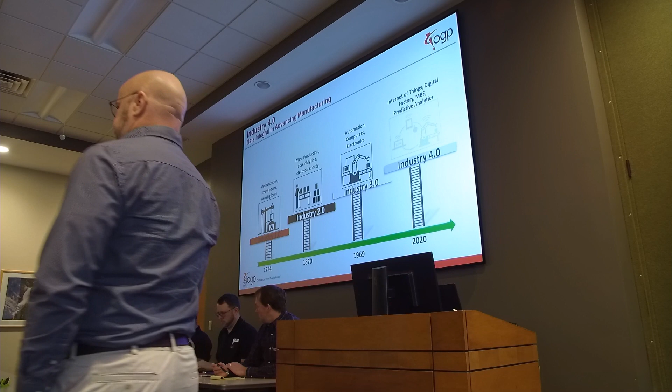So I'm going to go through each one of those terms and just give you a little understanding of what that is. So Industry 4.0, again, a buzzword. A lot of people don't really know why it's called Industry 4.0, what that means. But basically, it's the next phase in how we do manufacturing and how we automate things. So you look at Industry 1, Industry 2, and Industry 3. Those were real things as well. The most recent one was automation.

What's an example of automation? What's that? Cars. Cars, yep. Cars was automation. Something you guys probably interact with every day, a CMM or a smart scope. That's an automated tool. So that's really Industry 3.0, okay? Industry 2.0, you think about the most well-known is the Ford production line, right? Mass production, assembly line kind of stuff. And so each phase as we go through eras, really, you're making our lives as humans more efficient.

So Industry 4.0 is taking Industry 3.0 and connecting the dots. So I have this automation thing and I have this automation thing, and they should probably be able to communicate to each other so that that information can flow from a CAD system, which we're going to talk about today, to a metrology system, to a data analysis system, and all that information is connected to each other, and you gain efficiencies. So that's really what Industry 4.0 is about.

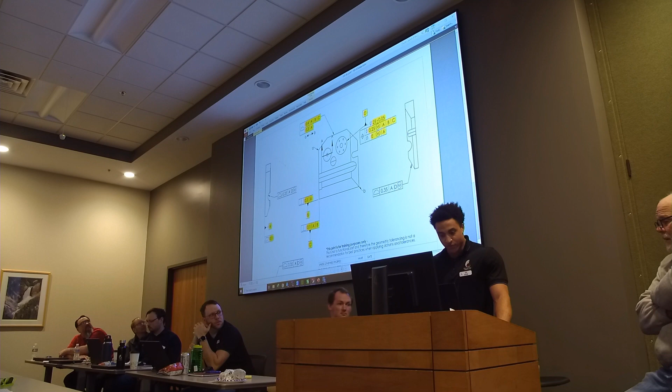So this is the print of that OGP demo part that Keith mentioned that I will be preparing the data for.

Are we okay, Greg? Greg Hetland approved, so we...

So if we don't have the QIF file right off the bat, we would just import the CAD model. So we have a step file for the part here. And the print says that this bottom surface is our datum A, so we'll go to dimensions and datums. Whoops, click the wrong surface.

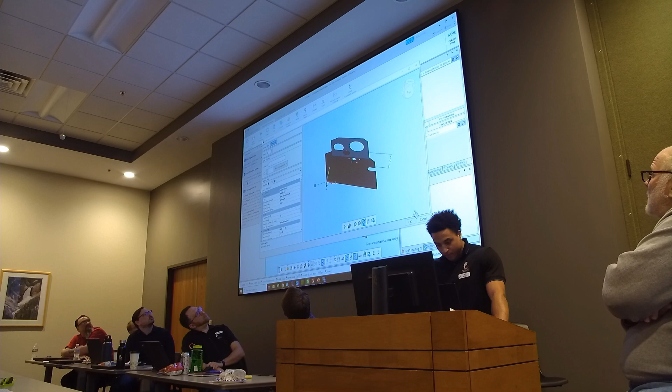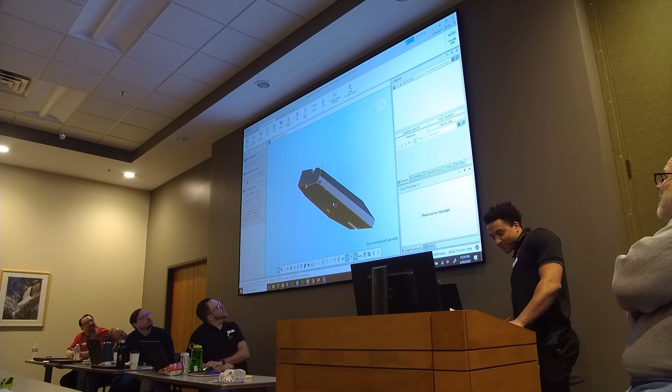Just a little bit. Yeah, there you go. There we go. So we'll call that datum A. We'll click on datum, and this drop-down menu allows you to name it. Yeah, a little louder. Oh. You're moving your mouse, that's why. Oh. Moving the mouse while we...

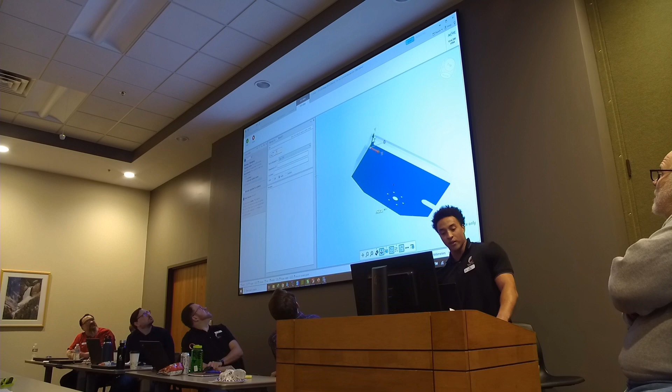There we go. Okay, so we'll call this datum A. I also see that we have a flatness call out for this surface, so we'll go to GD&T tolerances, and we'll select flatness, and on the print it says 0.1, and we'll label this as dimension 1.

Now we have everything set for our datum A, and this front surface is labeled as our datum B. We don't have to label the GD&T and datum separately. We can do them together. We just go straight to the GD&T tolerances. And for this face, we have a perpendicularity call out. And it'll bring you up to the datum drop-down menu, and we'll call this datum B.

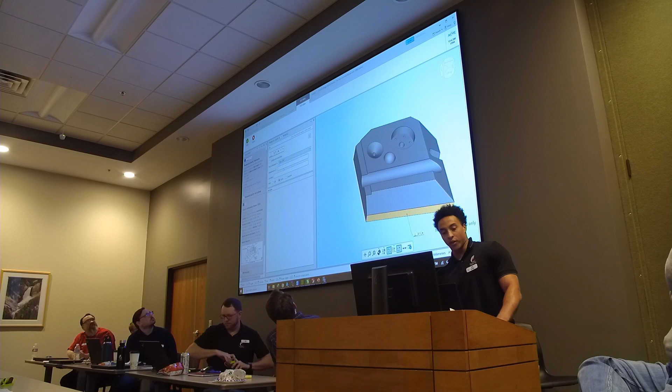Also, it automatically assumes that this surface is a plane, but you can change that type here if necessary. We'll click OK, and that perpendicularity call out is 0.1, reference to datum A. We'll call this dimension 2. And then our datum C is this left surface here, and another perpendicularity call out. Oops.

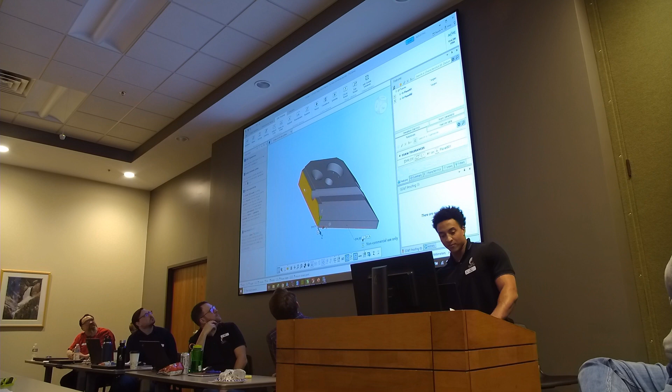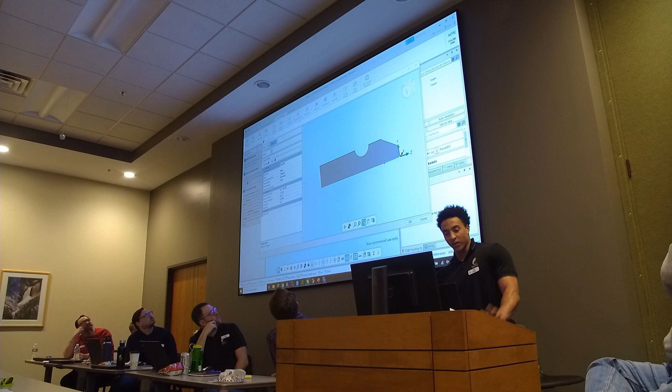Dragging the mouse. Roll the model over, make sure the bottom's not... All right. So we're good there. And this is our datum C. Click OK. Again, 0.1. This time it's referenced to datums A and B. This is our third dimension.

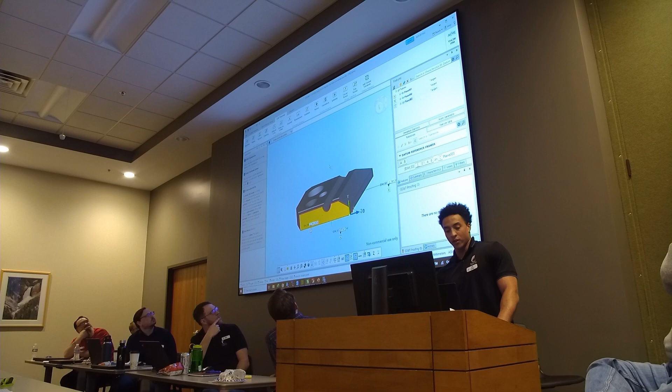And then our datum D is this cylinder here. And I notice it has a position callout. And we'll call this datum D. And this feature of size here, this 25mm diameter, is its own characteristic. So this will be our dimension 4. And we have a plus or minus 0.05mm tolerance.

And this position is 0.25. And we have a max material condition modifier. And then this icon gives a drop-down menu of all the suggested datum reference frames that we can use. And on the print, we have ABC here, so I'll click on that.

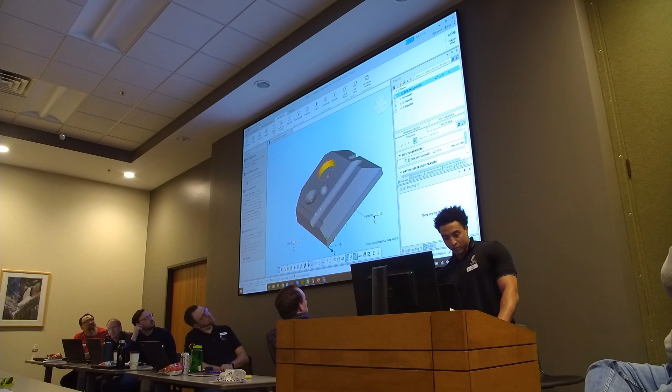And then we also have another tier here. So we'll click on this plus sign to get this bottom part. And on the print, it's 0, and it has a maximum material condition modifier to datum A. And we'll call this our dim 5. And that's pretty much how we would build the...

So you're 20% of the way there. So we're 2 minutes in, and we're 20% of the way into defining our GD&T project here. So you can see it goes pretty quick, and a nice thing is that it becomes the source for Zone 3, the source for PC-DMIS, the source for CT scanning. And so that's our way to put that together. And the other nice thing once we have it done is that we can generate this set of test points to see that our reporting is right.

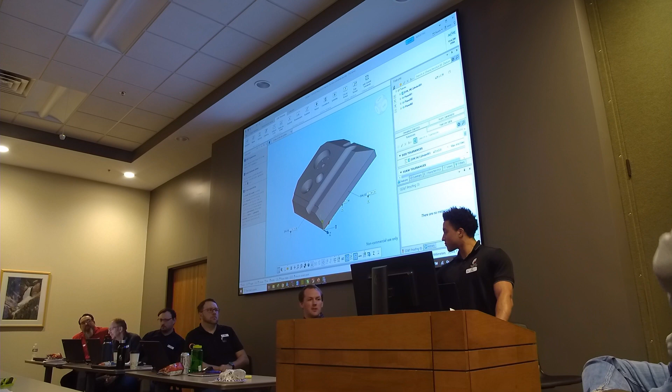Adam, are you just going to give a quick? Yeah, we'll step to that in just a second. It's fast to set up, but if we have 100 dimensions, 150 dimensions on a part, it starts to add up some time, where the QIF can really be a time saver in passing information between different processes. Setting up 5, 10, 20 dimensions, not a big deal, pretty straightforward. Larger, complex parts really see the benefit. Does this all make sense so far? Cool.

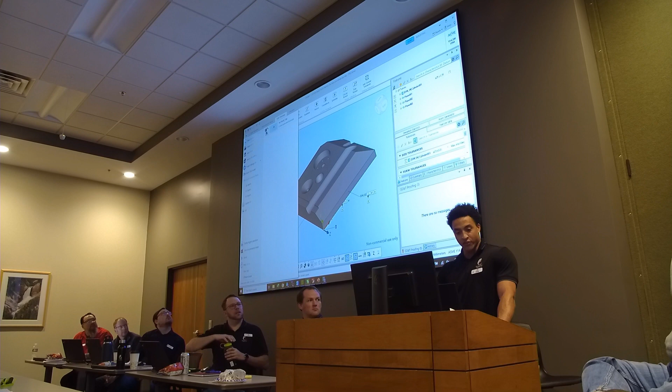All right, and then let's say we do have a QIF file. We can just import that, and we already have all the GD&T callouts on there and all the dimensions. And oftentimes the dimensions won't come labeled. We'll have to spend some time going in and numbering all of them, but it still saves us a whole lot if we have all the GD&T already in there.

And on the left side of the screen here, we have this explanation column, and if we click on one of the GD&T callouts, it gives a brief description of what's going on in each, and then it also gives us a link to the page in the GD&T standard that talks about that particular feature. That's that right there.

And then this GD&T proofing column shows any warnings or errors that may be present in any of the GD&T callouts. For example, here we have this message: apply size tolerance to the feature or remove material condition modifier. And that's talking about our datum D here. So if we go to our feature tree here, we'll go to our datum D.

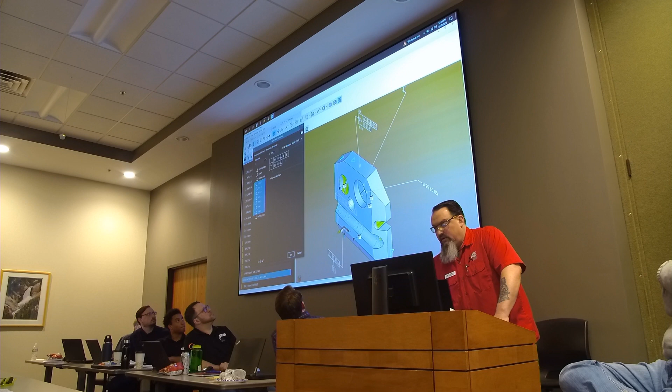So this particular call out is for profile from A to B. And that is these planes, this little notch in here with the planes, this radius, this plane in here. The problem that it's having is, it has a bunch of planes and a radius. We can't put all those. PC-DMIS in GeoTol won't take all of those into one thing. So to fix that, we go in and we make a feature set. And we start grabbing these points.

Create. Go back here. I'm gonna get rid of all those. All I want is scan 2. And all of this looks good. I like clearance cube on square parts, so we're gonna turn that on.

Manual mode, I can turn that to DCC. That's a bad plan. Don't do that without a manual alignment. The machine has no idea where the part is. Some other things you have to add. You know, at this step, we go below the load probe command, put in a manual alignment, and move on from there. But we can execute it.

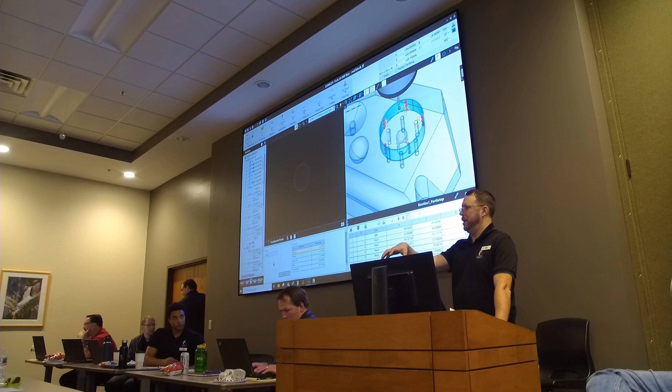And in this case, it's going to try to run a traditional probe, then switch over to the star probe for the bottom. So the order needs to be adjusted. One of the things I can do in Zone 3 is optimize my entire program, and I can go with sensor ordering. So now when I click OK, it's going to change the order of my features and combine everything so it's based on one sensor. So I'm not having to switch back and forth between a regular probe, the star probe, back to the regular probe and the optics. It bunches everything together and then optimizes the tool paths to run this as efficiently as possible.

So once I've got that done, I can just click the run option on here, and we can actually see different sensors running around, simulating the same thing that John would have done inside of PC-DMIS. When I hit stop on mine, it stops.

So in this case, we could run on my program. I'm going to say I want to send my points out to my file. Once I've got that done, I can just apply that to all the steps of my program by updating selected, putting my file output on all the steps.

Then at the very end of my program, the last thing I'll do is add a file output and select all my features to put in here. Then I'll adjust my template so it's in a format compatible with SmartProfile, and adjust the file location. In our case, we'd send it out to our point server.

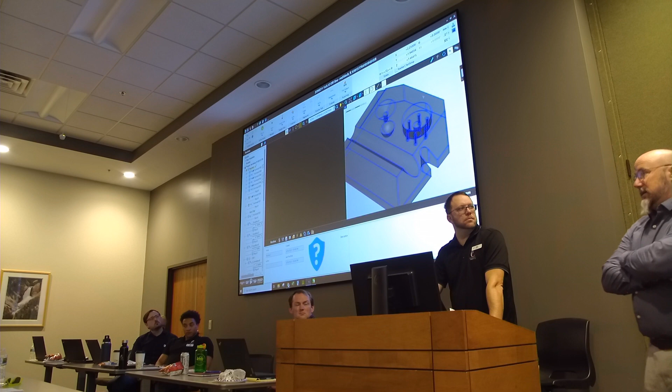Fairly convoluted. The other thing is if you have sheet metal, which is what video is good for measuring, that's usually a DXF file and not a 3D file. DXF files can't carry PMI either. So this is really intended for 3D geometries, 3D models.

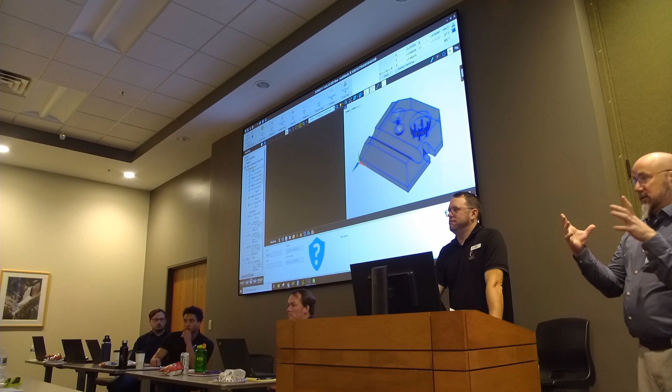Do you have software that can generate programs based off DXF files? Yeah, you can do it right in Zone 3. It just doesn't have the GD&T embedded in it. But you can take a 2D file and automate a program without GD&T embedded, since it's a little easier on 2D—using step templates, you can apply that to that kind of stuff.

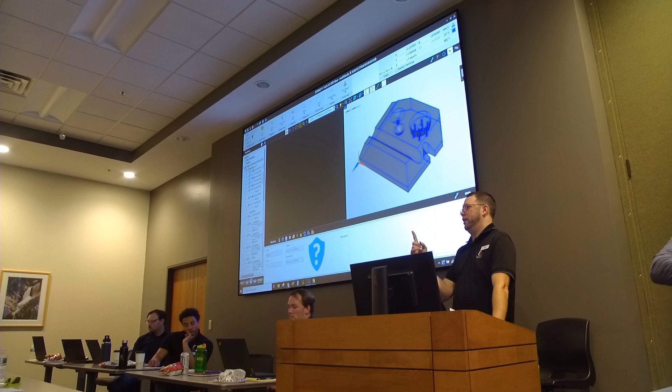So if you had a DXF file for a circuit board with 2,500 holes, you could say, take this step template, measure this diameter with backlight and feature finder, apply this to all the features that match that criteria, and instantly you've got your entire program populated after designing the feature off one item in your CAD model. You say apply to similar, and it'll parse your CAD model and duplicate that for every instance. You can do it straight with the DXF.

No, I don't have access to that.

I have a question too—can you change any of the strategies inside if you just have SmartProfile, or do you need design in order to define the measurement strategies? You can define the measurement strategies in SmartProfile or design. The definition of the measurement strategy—how I'm going to do the strategy—is a template in Zone 3. You come into Zone 3, measure a cylinder, set the parameters the way you want, and then it's saved, and design or SmartProfile will see that.

Can you do a head move in design? Yeah, head moves, PH10. We have CMMs also, and we put articulating heads on our multi-sensing systems, and we treat those as different tools. The whole tool list shows up in the sensor list—drop down the sensor list, and it'll show you every available sensor. Those sensors can be applied to templates for certain types of feature orientations or whatever.

Very, very good. Thank you.

Let me show one more thing—I just want to make one point. Go to my Metrology tree real quick. Oh, I need a reverse. Yeah, you can show the whole workflow.

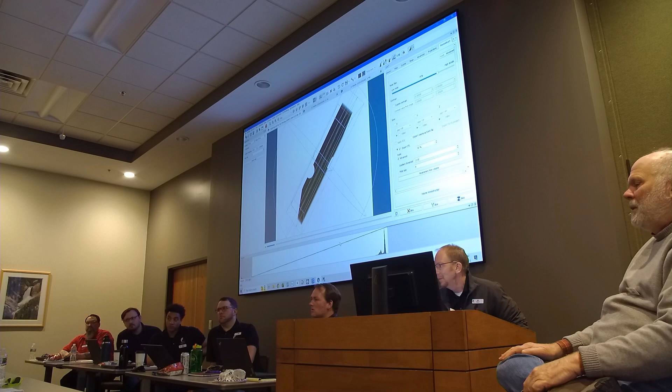Yes. You're going to take the CAD model before and program it in VG? Or no, this replaces the programming side of it. Yes, so all we're going to do - what you saw at the front end with Jake, whether it was a CMM, Zone 3, or a CT - we're done on the evaluation side. We've got everything we need to evaluate. Now the challenge is getting valid points to be evaluated.

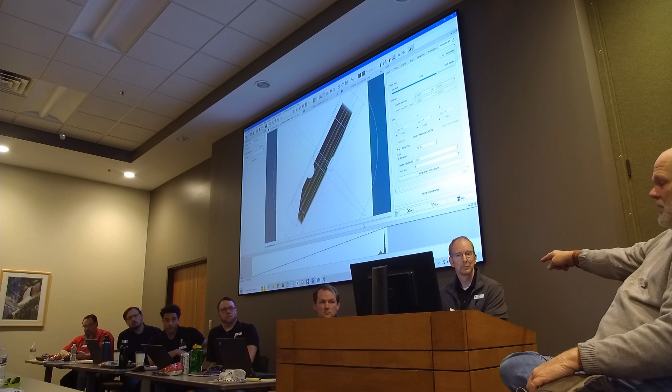So John says, here's how I do it in PC-DMIS, here's how I do it in Zone 3, and he's just going to say, here's how I would do it with my CT scanner. Once I've scanned that part, I have to reconstruct it and determine a surface mesh around it. So what I've done here, you can see this red line - I zoomed up here, right now it's looking at that edge. It's using a sub-voxeling technique, kind of a 3D version of sub-pixeling like a vision system, and it's finding a surface around there. So I say, yep, that looks good. I'm going to go over to reconstruct, and I'm going to do an export as STL.

So would you need a separate software for each type of equipment? Like CMM needs a certain one, CT needs a certain one, or will that software work for both pieces of equipment?

For us, for Evaluate, we don't care where the points come from. Something's got to make points, but after that it can't tell points from points - I don't care if it's CMM points, vision points, or CT points. On the back end it takes that file from the front end that says here's how you evaluate this. So all of the GD&T evaluation is happening in SmartProfile.

And so that's the beauty of it, and that's why some of our customers say, well, hey, I kind of get that maybe Zone 3 and PC-DMIS and Calypso and Metrology and Polyworks, they may not all give us the same answers. And so they're saying that we want answers from one place. And by the way, we validated this particular software, so that's where we want the answers to come from.

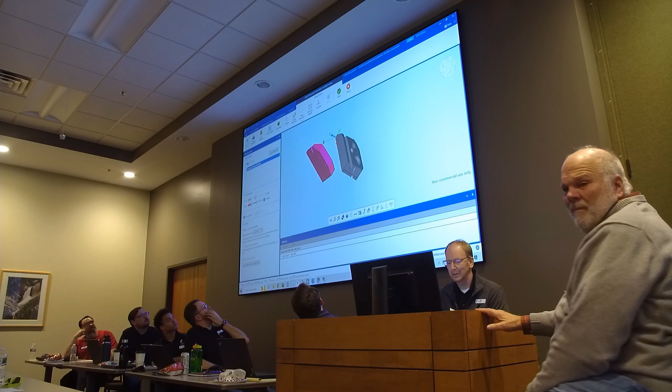So this is my project from Jake. It's a QIF, and we imported that. It's all ready to go. All I have to do is import that mesh. Red part mesh. Okay, here's my points. I start out with 656,368 points. You can see the point density here from that CT scan.

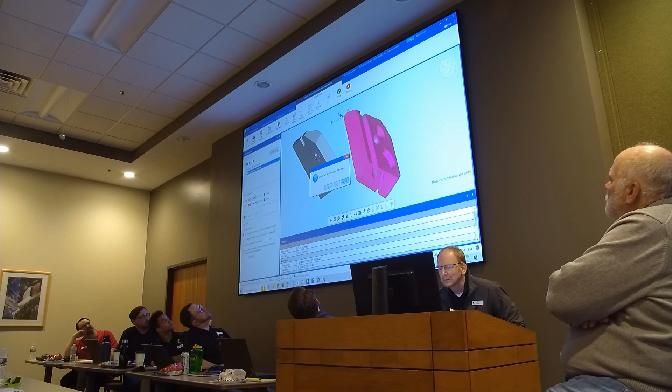I can choose to do a quick alignment of those points, or I can set up a template with a CMM-like sampler where it actually reduces those points down to a manageable amount of points. I have this red part template. There we go. Oops, did that wrong here. Load template. Taking longer than it normally does.

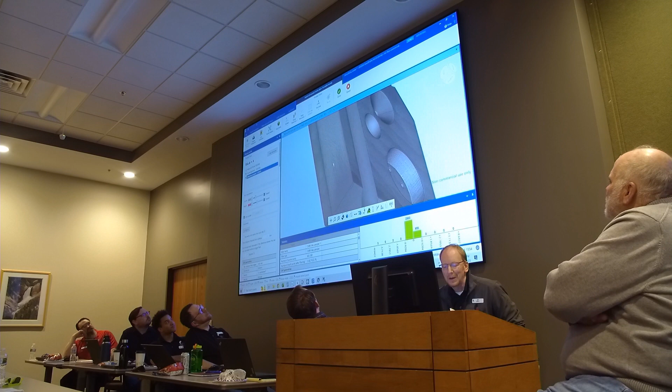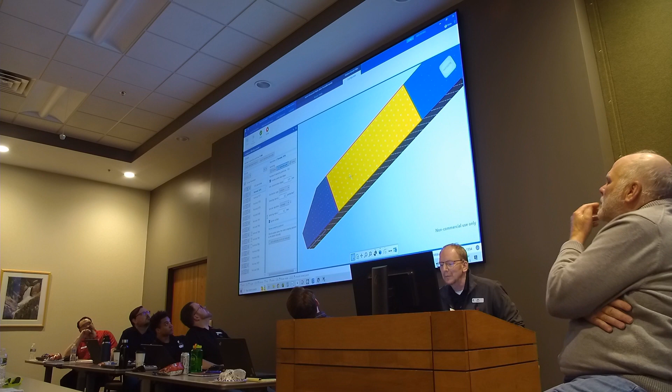Okay, so now I've got these features with a quick alignment. My template had the quick alignment in there, so it automatically aligned the parts. And then I have this CMM-like sampler where I can go in and manage these points based on their surface. So if I click on this nominal feature here, it's basically setting up a search radius at each one of these points. I can change the density or the distance from the edge of the wireframe.

If I change this to, let's say, 0.5, it increases the point density. My search radius, 0.5, I can bump that up. It'll take this radius and search for all of the points in that individual location and average them out to one individual point. There's other settings here where I can use the closest point to the center of that search radius. So if I were to say, I want 100 points, we could set up that search radius to get the desired number of points.

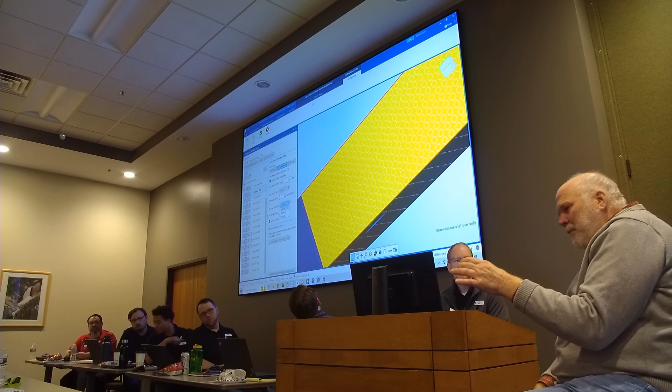And so now I got these little hockey pucks all laid on here and say, okay, I got 100 hockey pucks, and in each hockey puck, I got 1,000 points. I need to get it down to 1 point, and that's where you've got different strategies. You've got a dozen different strategies to go from the 1,000 down to 1.

And so in our case, what we'll do often is to say, okay, well, I can measure this thing on my CMM too, and I'm going to measure it on my CMM, and now I got really a high degree of confidence, and I'm going to see how does my point reduction number compare to my CMM number. And so if I get the same answers from the CMM and from the CT, I'm declaring victory.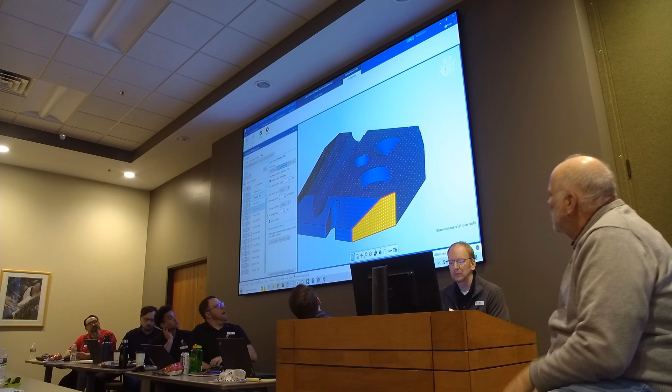So each one of these surfaces that was predefined by the QIF file, I can set up the parameters based on the feature size and the amount of points that I want in there. Once that's all done, I just hit done. I can preview everything right through here. Each one of these features lists the point taking strategy right down through this column.

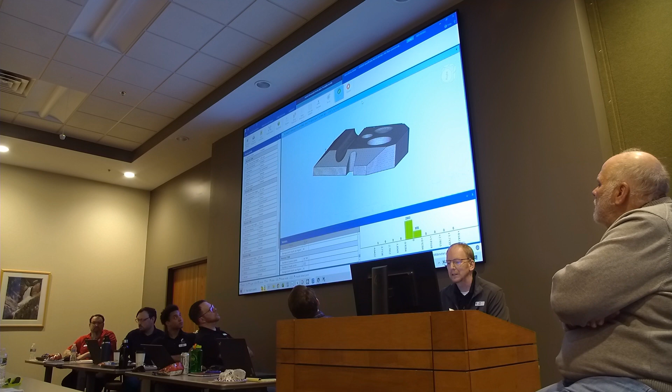And then over here, I can look at basically how many points I started with and how many points I've reduced down to. If I like that, I can hit done. Here's all of my points. They're already aligned. I went from 650,000 plus points down to 3420. So now all I gotta do is hit evaluate and I'm good to go.

And that's where for repeat measurement, a lot of this can be automated. Yep. So you're not doing this each and every time. Once you decide how to do it, all of this stuff just happens automatically. That's all I got. It's easy. How come in the corner it says it's run in 1994 for ASME instead of the 2018? Right here? Lower right. It's selectable within the software, so you can do 94, 2009, or 2018. It's all selectable.

It'd be based on here, project settings. GD&T. Doesn't have ISO. Oh yeah, there they all are. Look at all of them. Yeah. I'm not sure, does QIF pick the standard? You can. Mm-hmm, yes. Okay.

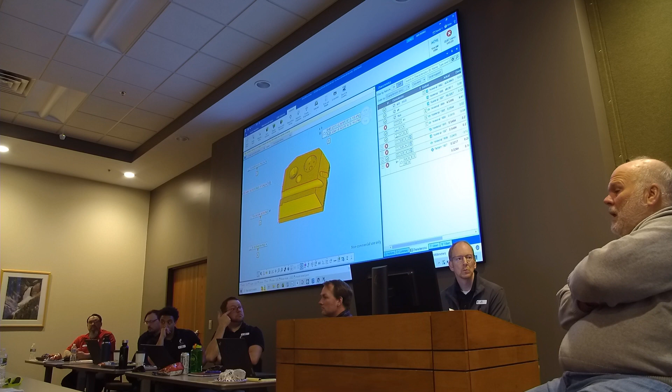When that little send to Zone 3 button from design does that, it's sending it via QIF data. And since design is defined as standard and everything else, the standard comes over with it. So when it comes into Zone 3, the standard is the same as when it was applied to design. So with this, then you wouldn't have to write your VG program ahead of time. VG would just be one of the transparent things that it passes through, more or less. VG makes the STL.

Brandon, what are you using VG for? Are you using it for reconstruction only? Well, we use it to write the program. You want to take your point cloud out of your CT and bring it in a PC, so do that too. You're reporting results out of there. The reporting results and the analysis can be bypassed. Right. And again, VG does the best job of this surface definition.

So, you know, we're in the metrology world. In the old days, I'm just looking for flaws in my helicopter transmission, so I'm not concerned with sub-thousandth of an inch kinds of things. But now all of a sudden, bring CT into metrology, and boy, I really need the best resolution and the best points I can get. And that's where for us in metrology, these VG guys really do a good job of surface definition.

Yeah, and the way we kind of do it now is, someone will let us know that they have a project coming up, they'll send us the CAD files, we'll write a program based off that CAD file, then we scan it, and then we overlay that scan with the CAD file for the measurement. Right. He's the guy who does it all. You would get a validated program, it would be written for you, right? You bring the QIF file into VG and stuff.

That's where in the Hexagon world, there's PC-DMIS, there's a package called Inspire, Volume Graphics has metrology built into it, Spatial Analyzer. So there's all these different softwares that give you all these different answers in theory. PC-DMIS is, from a metrology standpoint, the flagship of all of that. A lot of you guys know Rob Jensen. Rob was our trainer, and Rob's job was to be the PC-DMIS GD&T purity guy. So Geotol is really a lot of Rob's efforts.